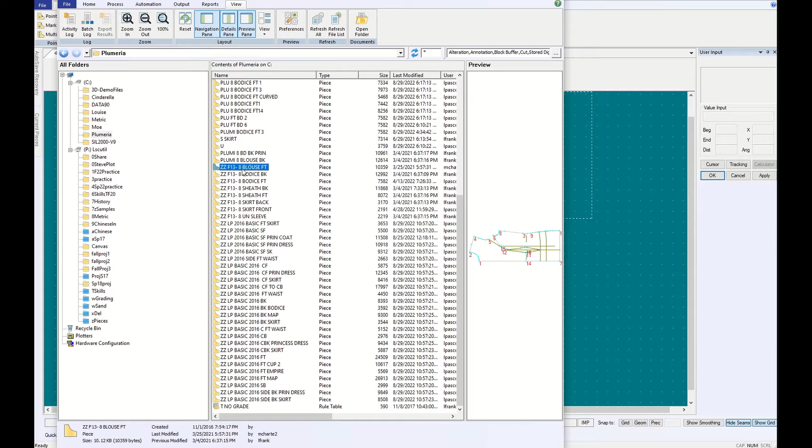So I'm renaming them all, and there actually is even a faster way to do this. It's been a while since I did it, but you can also go into Find and rename them all at the same time. So all of them have been renamed with my name. Most of them say size 8 and all of the piece names. That was easier to do quickly, just all in a row in AccuMark Explorer. Not Windows, AccuMark Explorer.

And now that I've got them changed, because I can use this one, the name within the model is not going to be correct. So all of my pieces are empty now because I changed the name.

So I'm going to go through and click on the name and then the dots, and I'm going to choose all of the ones that I just renamed and then open them.

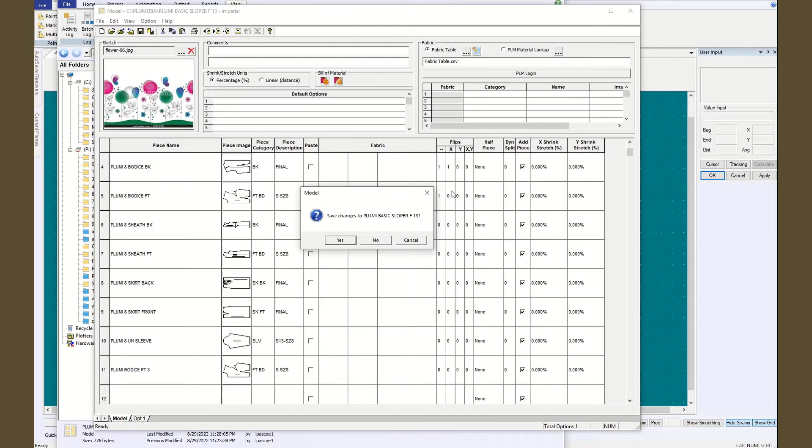So now I've got this in my name, and I've renamed the pieces, and that's the safest way to do that. So I can now come into File, Open, and I want my model and not my piece list, so I'm going to come down to this little box and switch to Model.

And there are my basic slopers. The ones that you were going to be using first are your front and your back.

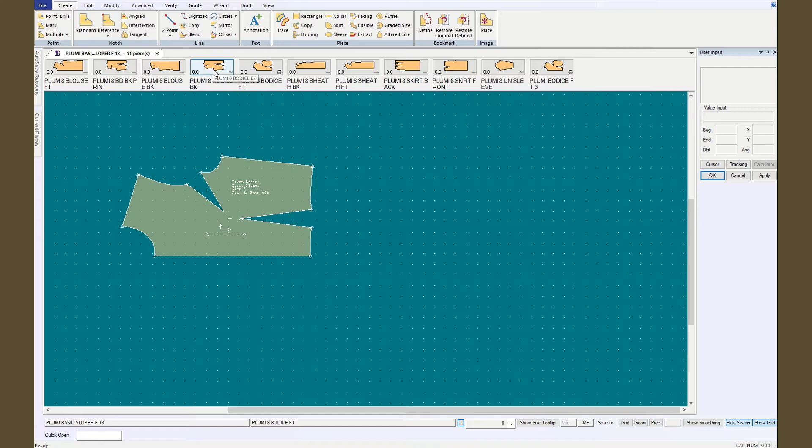Before you start using them, it would be a good idea to put your name on it and maybe leave a space for what is happening with the assignment. So if I come up to Edit Annotation, choose the annotation, say OK, that's all correct. I might be changing it from a basic sloper though, so I'm going to clear that.

I could put in Dart Practice, but I don't want to keep that on everything. So I've got front bodice, and I'm going to enter and add my name to the top of it.

And then apply. I can also choose copy because I've already changed that one. I'm just using copy, and I'm going to put it on the back, and it's my back bodice, so I'm changing the word front to the word back.

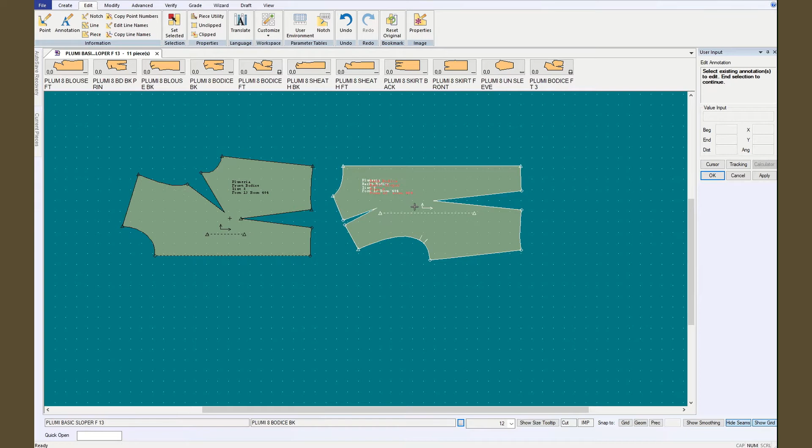And apply and OK. And then I've got this one, and I don't want that one anymore, so I'm going to delete that one because it's generic, and say OK. Except I need to delete one more letter.

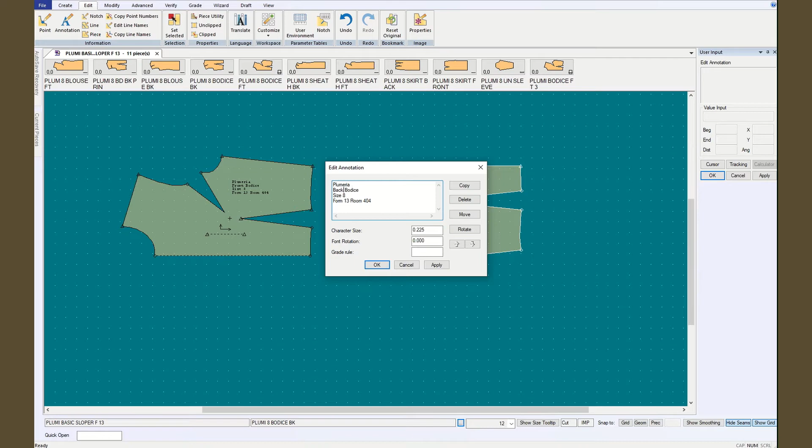Alright, apply and OK. So now with that generic label, it will be easier for you to just copy paste it where you need it to go, and you can delete Form 13 Room 404 too.

Okay, so now you're ready to start saving the pieces.

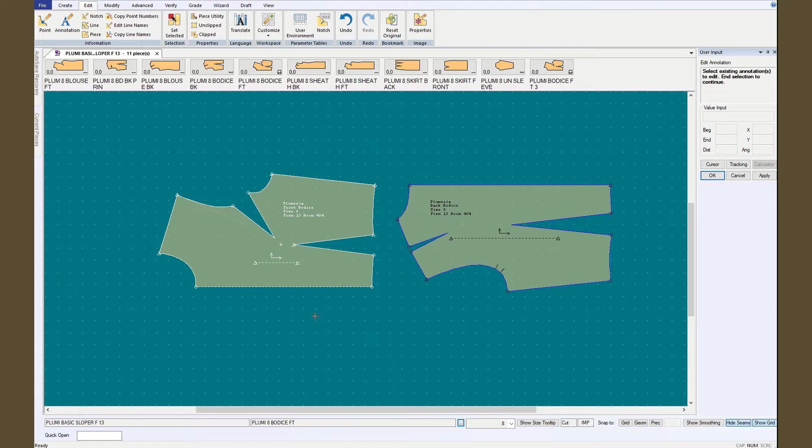I'm going to come out, because I only want to be working with these two right now, I'm going to open a new file. So I come up to File, this blue one, and say New, and that opened a new work area. So I'm going to come over and say File, Open, and switch back to Pieces.

And then I can come over to my bodice front and back and hold down the Shift key and open them both, and let's see if they saved. They are not saved.

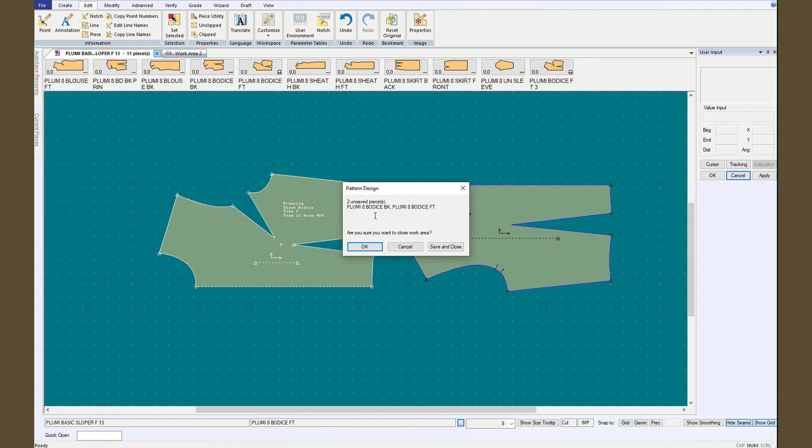So in order for them to actually save, I have to close this work area, and it asks me if I want to save those two pieces, and I'm going to have to say Save and Close.

So I'm going to go ahead and delete these two icons and open them again. And then Modify Delete Piece. I'm sure I will have shown you every mistake possible.

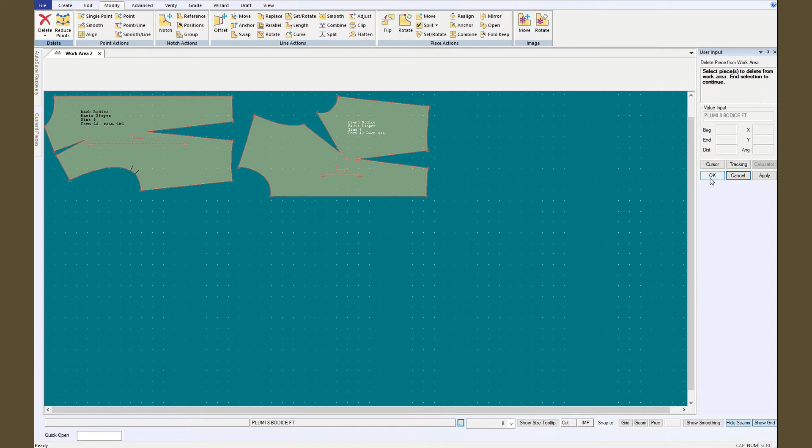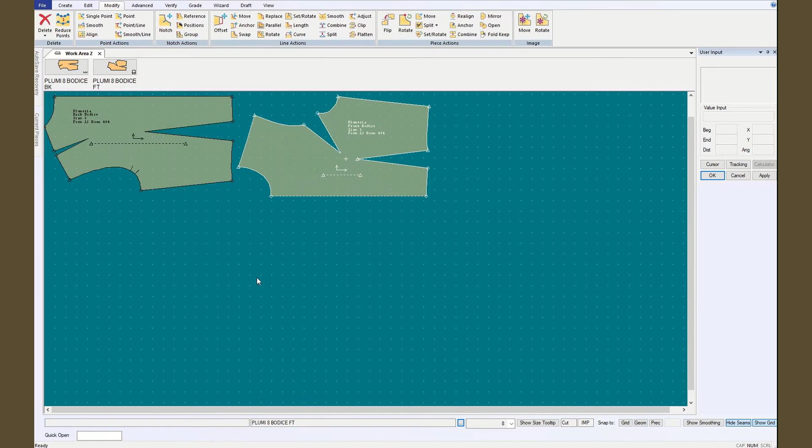Okay, File, Open, and now when I open those, they should be the new version. Yeah, so it has my name on it and the changes.

So now I can create piece copy and set it down, and I'm going to leave front one, I like that, and say OK.

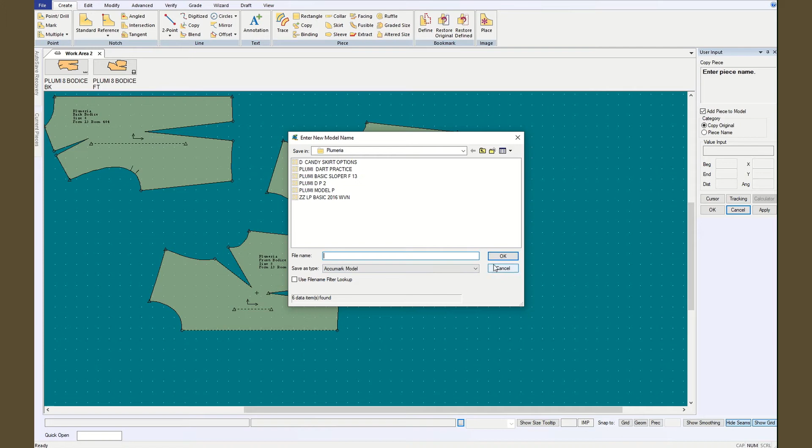And I don't want to enter codes. And I'm going to put it in my Dart practice. If I didn't already have Dart practice, then I would type in my name and Dart practice, if that's what I'm working on. If you're working on something else, you would type in the name of the model that you're going to use it in. So I'm going to cancel that.

I want to copy it again. So this time I'm going to label it Piece 2. And say OK. And if I don't want it to keep taking me to model, I'm going to uncheck that.

And I'm just going to keep doing that until I have the 6 pieces that I want. Well, the 5 pieces I want, because we've got our back. So we're up to 4.

So it doesn't have me add the types of pieces when I deselect Add Piece to Model. Okay, and 5. So I've got my 5 pieces.

And I'm going to cancel now so it stops making new pieces, and I've got the plain one that's already up there, and I've got piece 1, piece 2, well, I skipped 3.

So I need to make 2 more copies, and I'm going to copy these 2. But you get the idea. And as soon as I've saved them and I want to keep them and not have them get overwritten, I'm going to right click on them and say Piece to Menu.

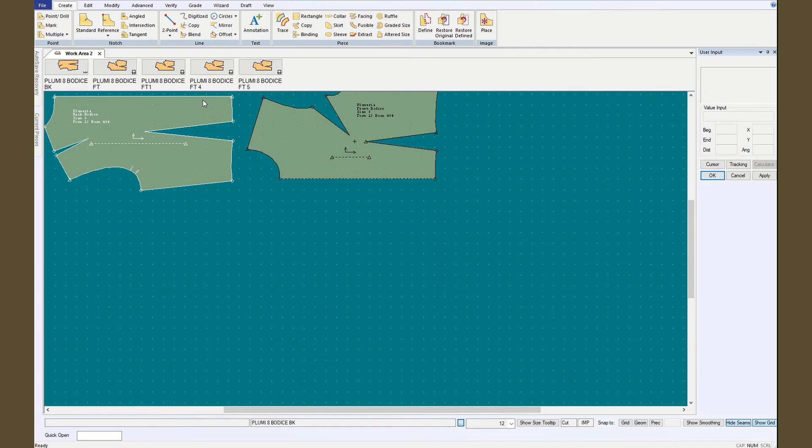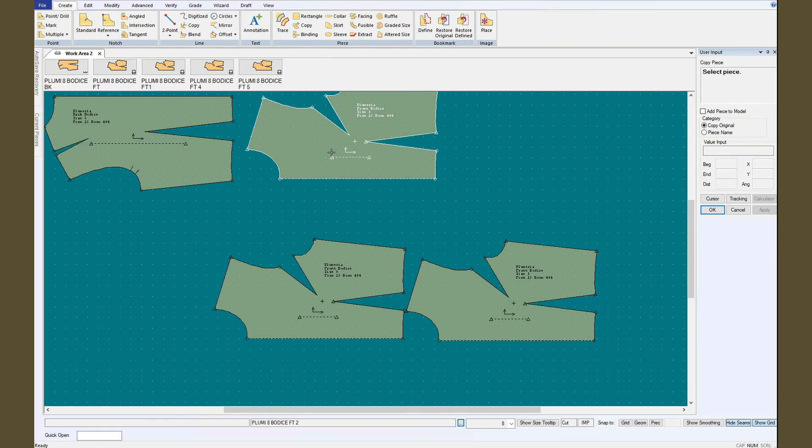So I'm going to go back in to create. Piece Copy, and create Piece 2 and 3. And this one I want to give it a different name, because if I make a change to it, it's going to be in a new model by itself.

Okay, so I'm finished with that. So this one's already in the list up there. This one doesn't have a space yet.

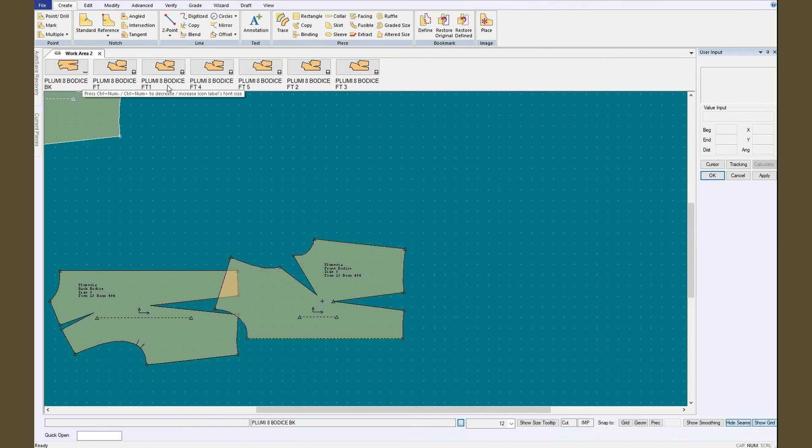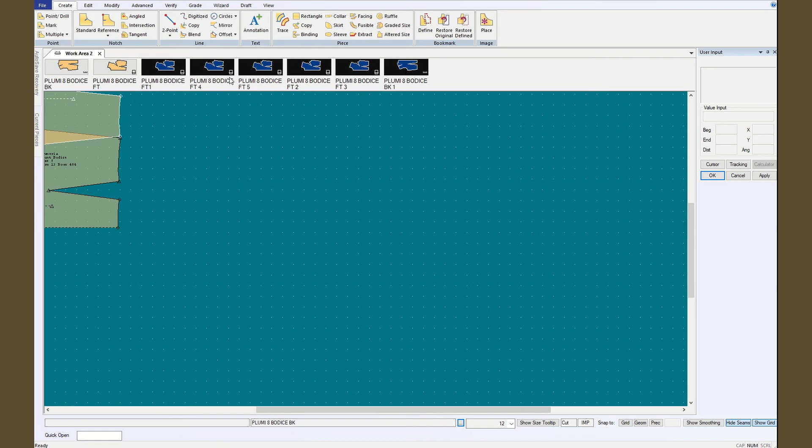So I put all my new pieces in the menu. And if I'm going to use those for something else, I'm going to highlight all of them. I'm holding down the key, and then I'm going to push, and they will all come down here.

So that probably wasn't very clear. I'm going to come up to Modify, over to Delete, and I'm going to delete all the pieces from the screen. So one more time, I want these 6 pieces.

So I'm going to touch down and hold the button and drag it across. Then I'm going to release the button. All of the pieces are highlighted, and that was my pointer finger on the left mouse button. Then I'm going to touch that again, click once with the left mouse button, and that brings them all down.

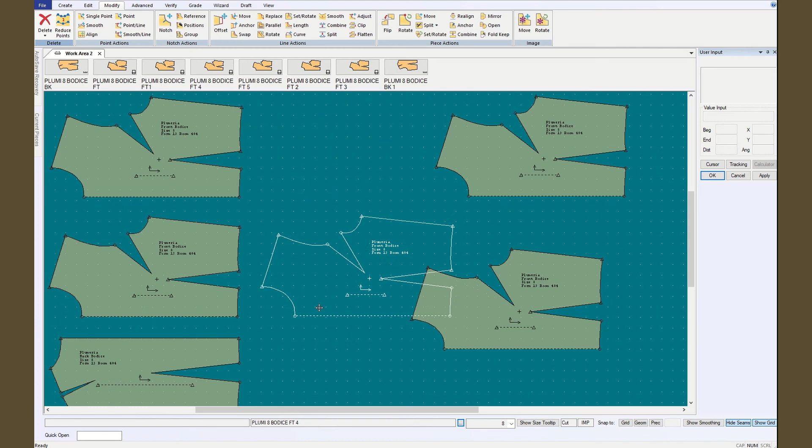Maybe I'm a little OCD, but I'm going to put my bodice front first and my second one, because they're going to appear in the order that I click on them. So there we go — that's the order I want them to appear in my new model.

So I'm going to come up and say File, Create Edit Model, Add Pieces, and I'm going to start a new model. I'll start with my name — always start with your name so they end up together when we're looking for them.

And Dart Practice — I've already got one by that name, so I'll call it Dart Practice 3. But you would name it whatever you were going to use the pieces for. And because of the way I did it, I already have them all labeled.

Did I actually do that? I just gave it the name. File, Add Pieces. There it is. Say OK.

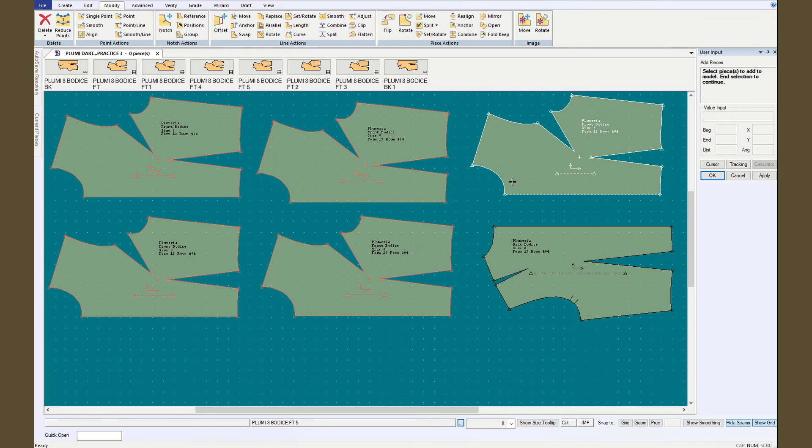Now it says to select the pieces to add to the model, which I didn't do last time, and I'm going to check them, clicking on them in the order that I want them to appear there. So now they are all there.

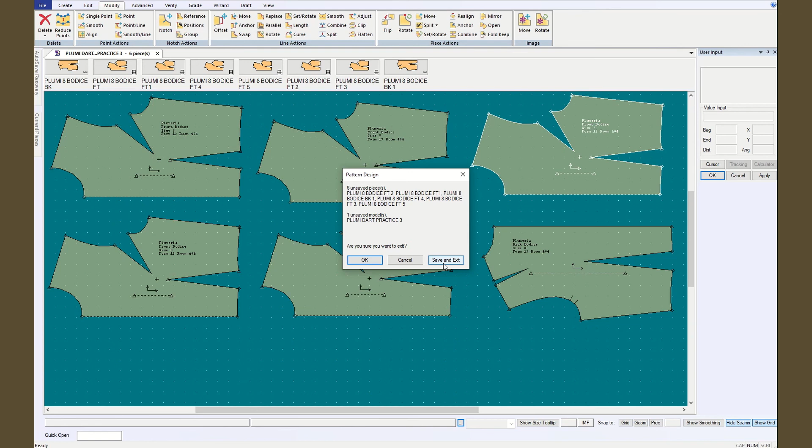And I can go ahead and make changes to my pieces. If I decide I want to close this and I'm finished, I'll click on it, and it says I clicked on the X. I have 6 unsaved pieces and 1 unsaved model, so I want to say save and exit so I don't lose them.

And now I can see Dart Practice number 3. I can see the pieces that are in it.

And if you have an eDrive or you want to copy what you've done to ZeroShare — this would be after you've made changes to the pieces — you would right click on it and say Copy, and then put it in the file folder. So if I were turning it in, Fall 22 Practice, I would highlight that and say Paste Components, and my file folder and the pieces, my piece list and pieces, went in, and so now I can grade them.

We're missing the grade rule that we need here. So I'm going to come down and right click, copy that, and go ahead and put it into the practice folder.

Okay, so that would be how you would turn them in if you were ready to turn them in, or how you would paste them into your eDrive if you want a backup copy, which would be smart.